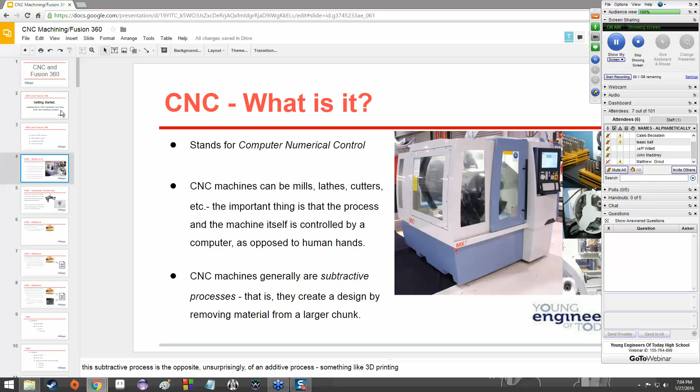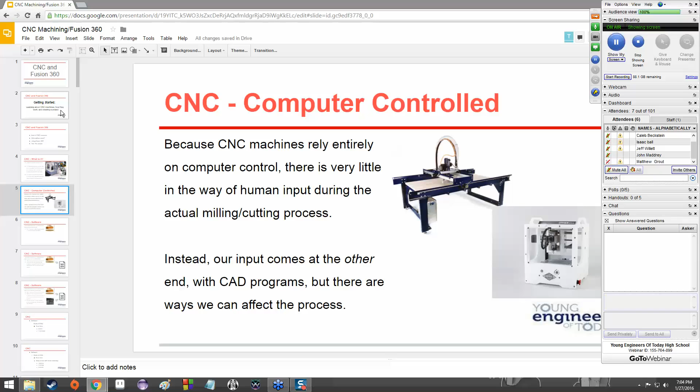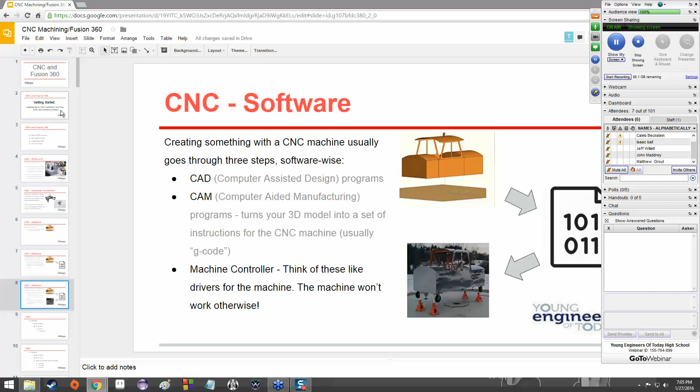Most of your input is going to come through CAD programs in generating the actual initial design, although there is some stuff you can do in CAM programs, which will allow you to change how the model - or how the machine - is going to cut out the model from the stock. So it can be either a faster cut or more precise. You do it to ensure you don't accidentally cut off any pieces of your model or anything like that, just various things. And then there's the machine controller, which are drivers that eventually control the machine, sending the instructions to it so it can cut out whatever you've set up.

We talked about the different kinds of CAD software. There's more freeform and artistic software, some software that lies in the middle, and then the very engineering-based, professional grade software, which Fusion can count itself among. If you guys get familiar with this, you should be pretty well prepared for a lot of other technical CAD programs that might come your way, like SolidWorks for instance. SolidWorks is similar enough to Fusion that you would have a much easier time figuring your way around everything.

And then we talked about CAM software, different types of CAM software, mostly having to do with manufacturers, who they work with or don't work with, what they can do, things like that. And then machine controllers - again, like drivers - they can be operating system specific, brand specific, or more generalized.

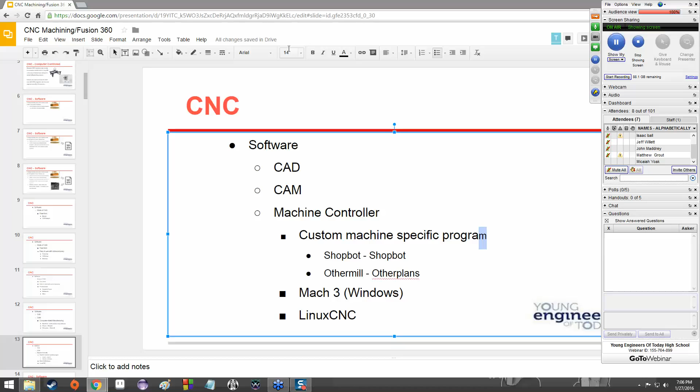We said that most software has at least a couple of these steps integrated into it. For instance, Fusion 360, which we're going to be working with...

Cat is lying down on a bag that has more bags inside of it and is just making so much noise. Sorry if you can hear that.

Most of these have a couple of steps integrated directly into them. Fusion 360 is CAD software, although it can function as CAM software as well. There is a CAM portion of the program that you can use to get it set up for a CNC machine, so it serves double duty. Once we get far enough with the bookcase, we'll spend some time experimenting with the CAM part of Fusion 360 so you guys can get familiar with that for your lab portion.

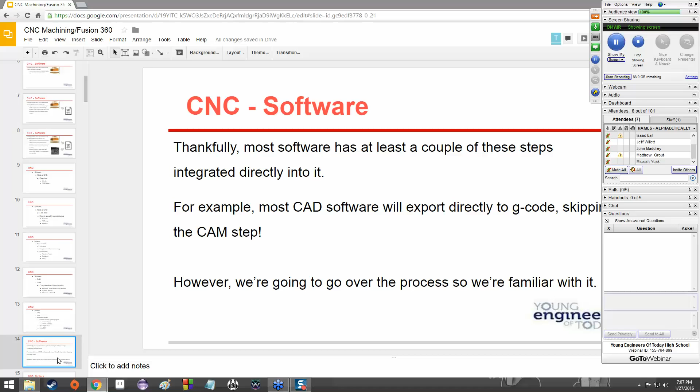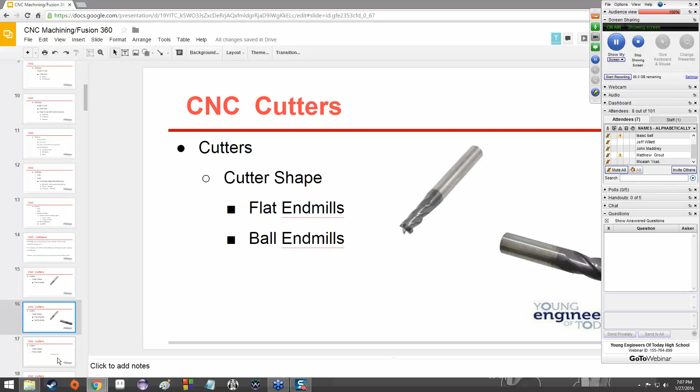We talked about the different types of cutters, just a couple of examples. Cutters will serve different purposes based on their shape and things like that. You might need one in order to get a cut started. You might need another one to shave things off the side. You might need another one to get more of a tapered cut on something without rotating everything. It all depends on the tool you have and the purpose you want to use it for.

And then we talked about some of the properties that you can affect in a CNC machine, specifically speed and feed rate. Speed being the rotational speed of the cutter in revolutions per minute, and feed rate being the speed that the cutter is moving through the stock.

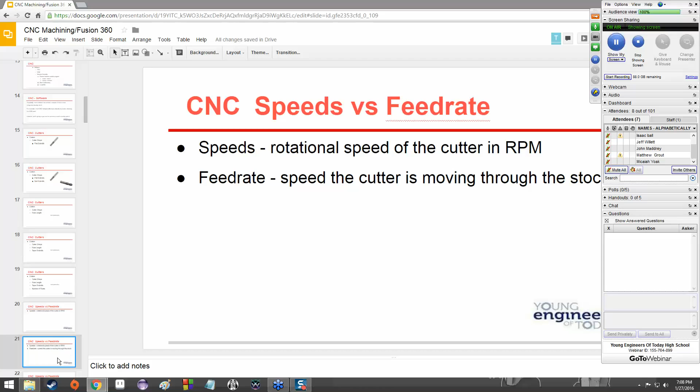Can't really do that because it's going to change based on the job, based on what you're using, all that kind of stuff. So you want to generally look at the recommended settings on an Othermill or a Shopbot or whatever kind of CNC machine you're using, and fiddle with it from there. Say, maybe I want it to be a little bit more precise, so I'll have it go a little bit slower, that kind of thing.

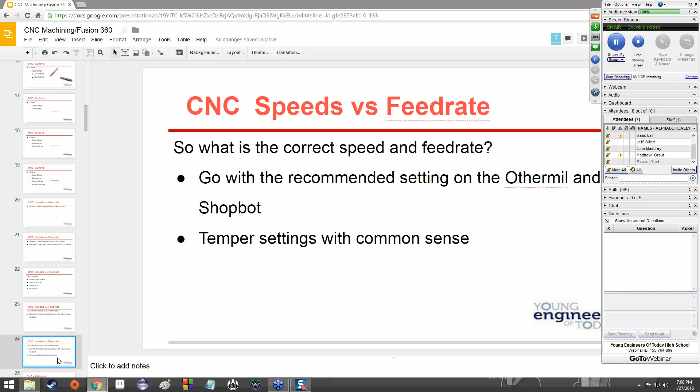It matters though, because you want to make sure that you don't break any of your cutters, and you want to keep it as accurate and precise as possible, so that you generally have a nice-looking model.

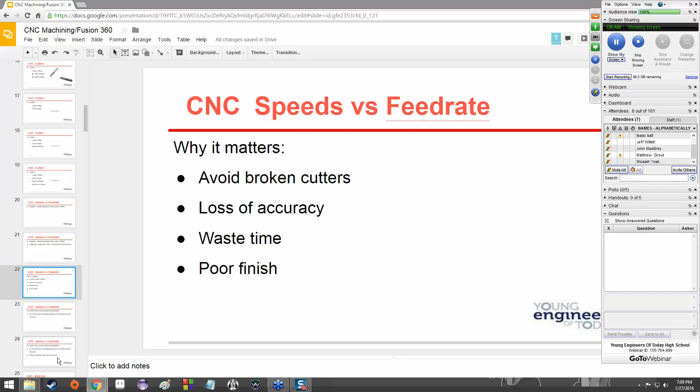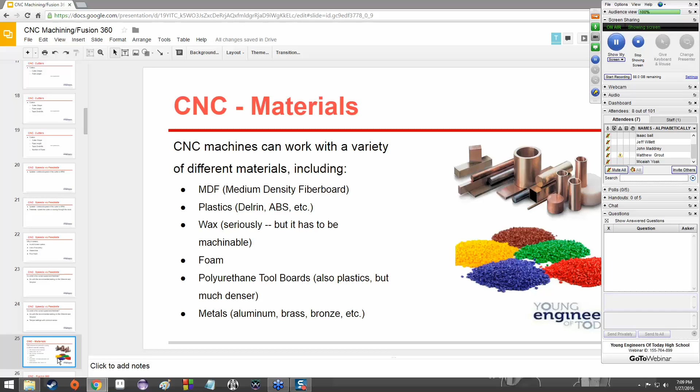And then we talked about the kinds of materials it can use. We actually talked about a decent amount on Monday: metals, plastics, wax, foam, wood, medium density fiberboard, which if I remember correctly is a type of compressed wood. Anyway, just a whole bunch of different stuff.

And then we went over the process for getting it downloaded from Fusion 360's site. So we spent a little bit of time getting that downloaded and started for you guys. Hopefully that should be downloaded now.

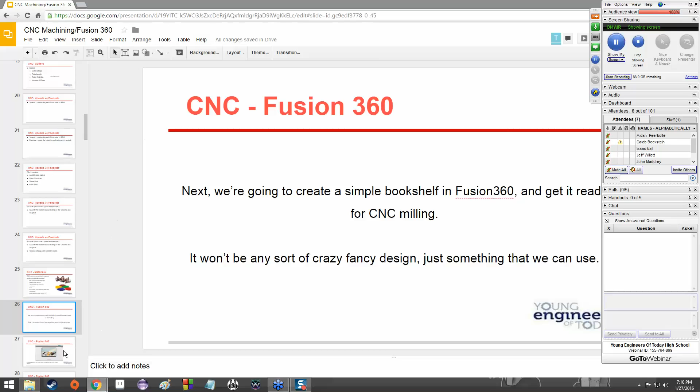So let's go ahead and open up Fusion 360. Where is it hiding? There it is.

Fusion 360 is a decently memory intensive program, so it can be a little bit slow to start up the first time, especially if there's something to download. So be patient, give it maybe a minute or so to do its thing.

If you already have an account, that's excellent, just go ahead and enter in your email address or username and your password. If you don't, you can sign up, and of course that requires some personal information.

Now, Autodesk is generally a name you can more or less trust, so you don't necessarily have to worry too much about what kind of information you're putting in there. So you can put your information in there, that's okay.

First name, last name, give it an email address, and then set up a password, and then make sure to agree to the terms of service, the second checkbox. You can keep the first checkbox unchecked because all it does is send you emails about promotions and stuff like that.

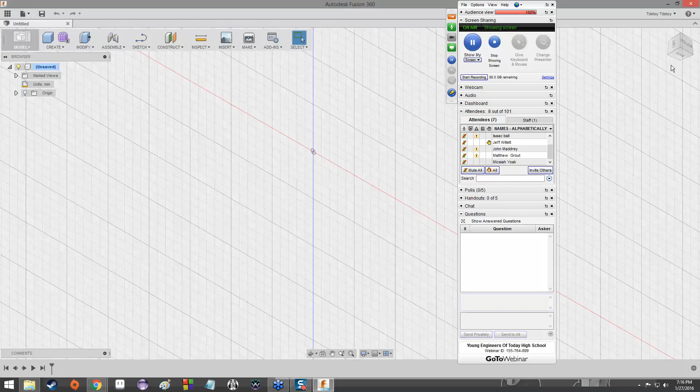You can also notice that if you mouse over individual bits, they get highlighted, which means you can click on it and it will automatically bring that to the front. So I clicked on the far corner and it automatically reoriented everything so that it was back at the front. I can click on a plane, or a face rather, in order to look directly on that face. I can also click the home button back here and it reorients me to a 3/4 view, a more traditional view that tends to be used a lot for 3D projection and stuff like that on computers.

Now you'll notice that I've also got a grid down here. The grid is in whatever set of units you have it set to. In this case, it's going to be millimeters, but we're actually going to change that in a moment. This allows you at a glance to tell how large something is, or what it is relative to something else. But you've also got these colored lines, a red line, a blue line, and if I change the orientation so I look at it front on, you've also got a green line.

Those of you who have used math before, so pretty much everybody, may be able to make the connection between these and the different axes. So you've got the x-axis, the y-axis, and then vertically you've got the z-axis. Where these all meet is going to be the origin. It all sounds pretty familiar, right? That shouldn't be anything new. So that's a good way to orient yourself on the Fusion 360 plane, is to figure out where your axes are and figure out where the origin is. That helps you keep track of where you are and where everything is.

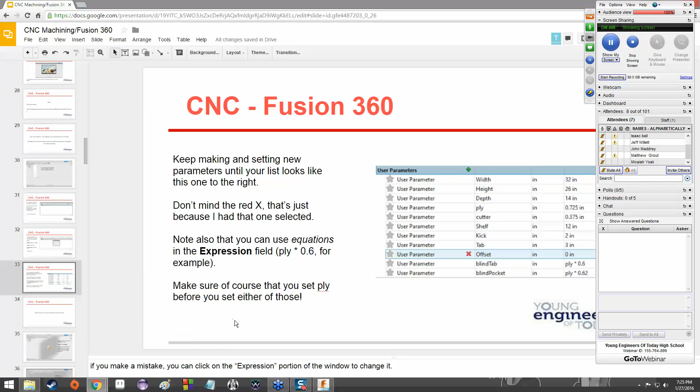So let's add in a new value, and we're going to call it blindTab. Lowercase b, but a capital T. B-L-I-N-D, capital T-A-B, all one word—it has to be all one word. That's the reason I'm using the capital T here, so you can more easily tell that they're two words. So far so good, right? blindTab, it's a name. We're already well familiar with names. I don't need to explain names to you.

However, in this expression field—this is the reason why it's called expression instead of value—we could put in like 0.3126587 or whatever, and let it figure out its deal from there. Or, we can put in a mathematical expression. In this case, ply times 0.6. And then as you see, value automatically populates with a number, 0.435.

So ply times 0.6. Now, why might this be useful? Well, let's say we're using blindTab down the line, and we've built the project halfway, and then we go, wait, the ply of the wood we're going to be using is different—it's actually going to be thicker ply. Normally that involves—and by the way, that kind of situation will happen a lot, not just in engineering but everywhere, but especially in engineering, where the constraints of the project or the materials you're working with will suddenly change. Normally, if you put all these values in hard-coded, you would have to go back and change all of them.

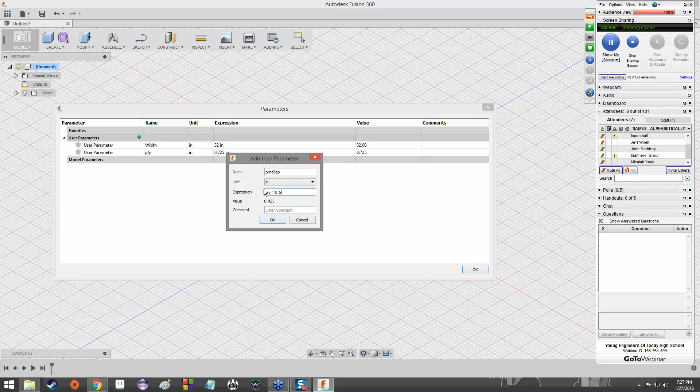So, cool. Once that's done, hit OK, and look at that—under expression it'll say ply times 0.6, and the reason it's OK is because I used all lowercase letters like I did with ply, and then it'll fill in with a numerical value here.

So with that in mind, let's go ahead and have you guys enter in all of these other values once it actually loads. Eventually. Extra challenge, fill in these values while you can't see them.

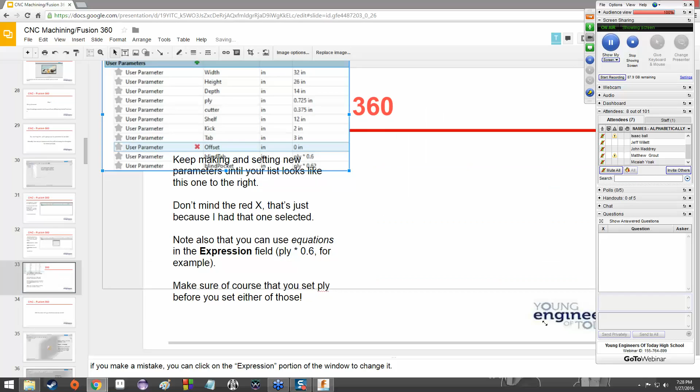Seems clear to me that Google Slides doesn't like me right now. Okay, let me go ahead and make this larger, and then I'll move this to the background.

There you go. Can you guys read that? Raise your hand if you cannot. Okay, so far so good. Go ahead and enter those in, and then raise your hand once you've entered them all in.

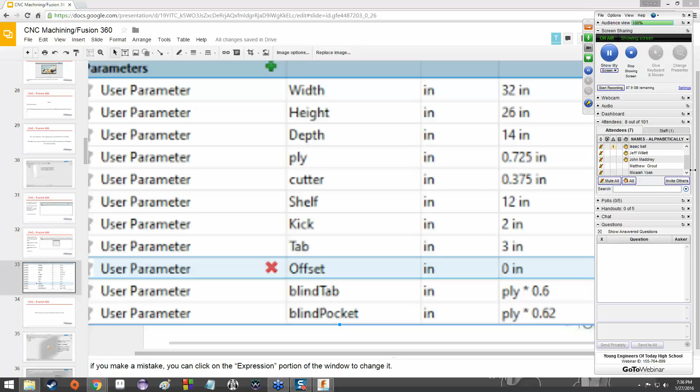So, okay, I rambled on long enough. Let's go ahead and return this back to its former state. Perfect. So now we've done that.

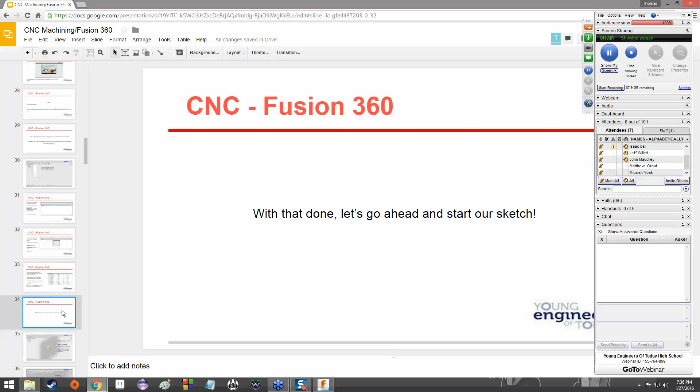That's pretty much all the prep work we need to do in order to get our sketch started. So now what we're going to do is I'm actually going to finish the stuff, because I was so wrapped up in making sure you guys had that stuff down that I didn't actually do my due diligence. Whoops.

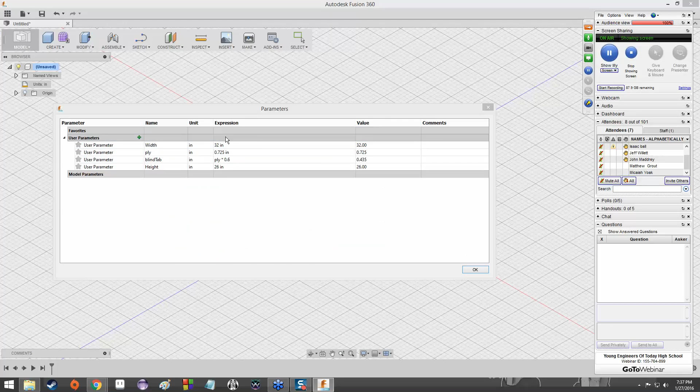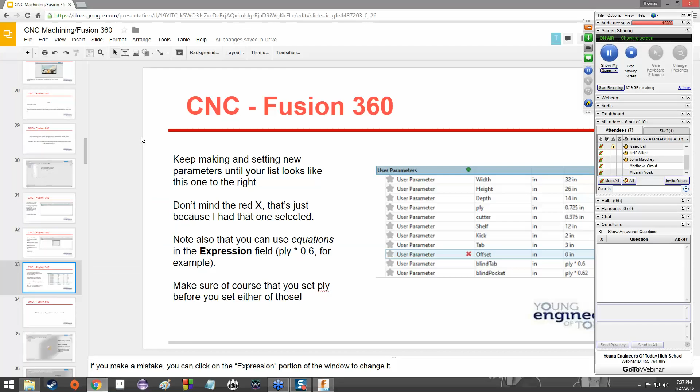Zero 0.62? Yep, 0.62. Okay, now that I'm done and I'm caught up with you guys, let's start our sketch.

So the way we're going to do that is we are going to go over here into our little sketch drop-down menu, and then we're going to select, mouse over rectangle, which is going to bring up another submenu, and then we're going to select two-point rectangle.

Now you should see these three sort of distorted squares. This allows us to start on a specific plane, so we can either start on the top, looking from the top down, or the front, looking directly at it, or from the right. So we're going to set it up so this is actually going to be the left side of the model, but we're looking at it from the right towards the left. We're going to do a side profile of our bookshelf, which means we're going to use the right plane. So just go ahead and select that one on the left.

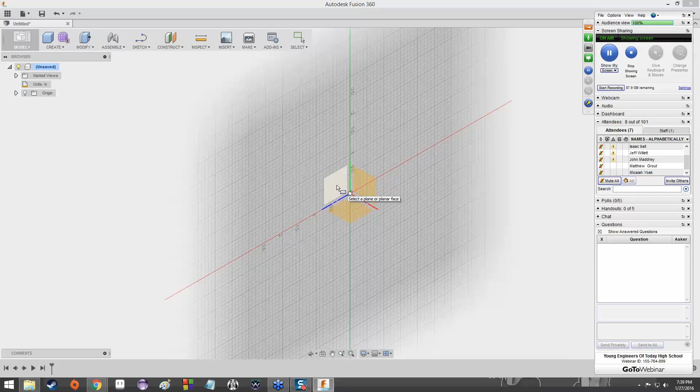It's kind of confusing when they're flipped around like that. But anyway, go ahead and click on the right one, and then it should zoom, and zoom over to the side like this. It's pretty neat.

So now we're looking at our grid from the side. As you can see, we got our z-axis and we got our y-axis here.

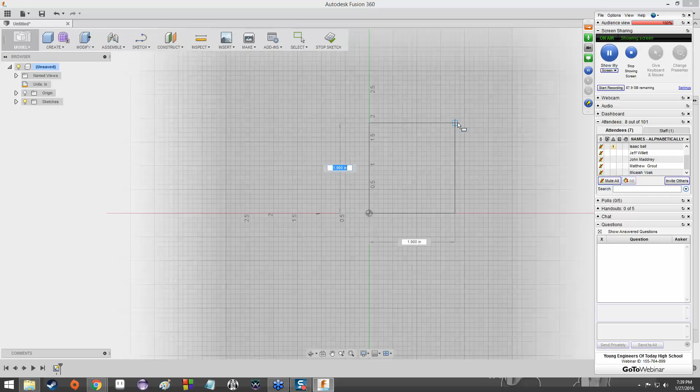Go ahead and draw a rectangle. Do not worry about the dimensions of the rectangle, just draw one. So yeah, I just didn't even think about it, I just went click, click, and made a rectangle. Why does it not matter, you might ask?

And if you did ask that, I would go, that's an excellent question. I'm actually just about to show you. What tab? Oh yeah, it's just under Sketch, Rectangle, two-point rectangle.

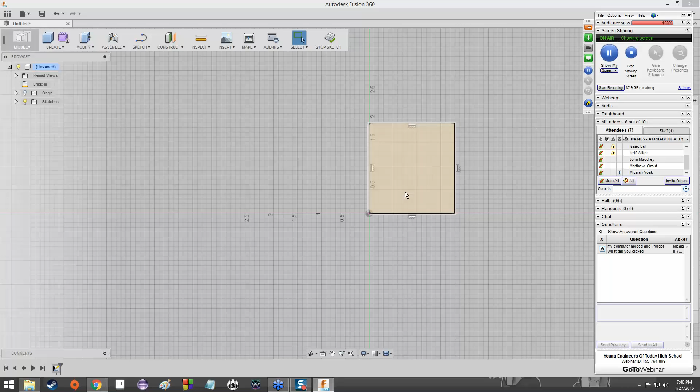And then that should bring you to the rectangle drawing tool. Make sure to select the right plane when you do it, which is on the left side. It's weird, the one that's not front or top. And you can check the little cube over here to make sure that you're looking at the right thing. If you click on it and now it says right, then excellent, you are in the, well, right place.

So, like I said, arbitrarily sized rectangle. Why is that okay? Well, I touched on it on Monday when I was introducing you guys to Fusion 360, but I'll go over it again here. That's because everything needs to be tightly constrained in Fusion 360.

That is to say, we need to set a dimension for pretty much everything to ensure that it's of the proper size, of the proper scale, and everything fits together nicely, because this is meant to be an engineering grade CAD program. So, with that in mind, under Sketch, go ahead and select Sketch Dimension.

Just click it, and now you should get a couple of vertical bars with a two-headed arrow next to your cursor. And if I mouse over any of these things, like if I mouse over any of these lines, you'll notice that they get highlighted.

So far, so good. Let's select this front line here and click once. Now we can move the cursor, and you notice there's a similar kind of deal - it's two bars, except this time they're horizontal, with a double-headed arrow. And there's a number on it, 1.9 in my case. Yours is probably going to be something else.

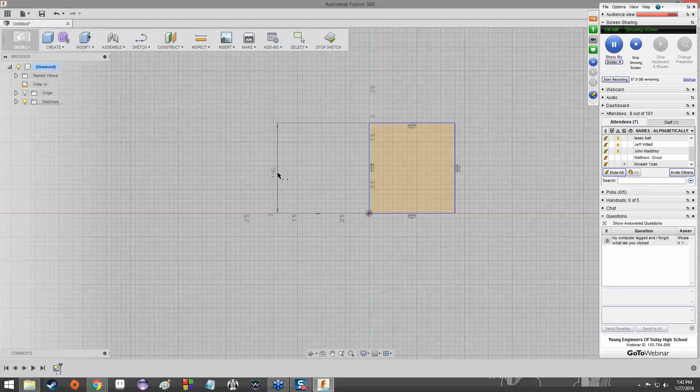This is telling us the size of it. However, we're going to do one more thing: pull it out an appropriate distance - that's fine, you could do it even closer - and then click one more time. Now that 1.9, in my case, turns into a text box. We can put in whatever value here. We could put in like 1,000,000 inches if we wanted to, and then this rectangle would resize itself so that this side, and by extension this side, will be 1,000,000 inches long.

However, we're going to leverage the user presets we just created. So instead of typing in a numerical value, I'm going to type in height. And you can see where the capitalization becomes important here - I used a capital H when I created my user preset. If I use a lowercase h, the text turns red and it goes, I don't know what you're talking about. And you gotta go, no, I meant height. And it goes, oh, height, okay, and then it turns black and everything's okay.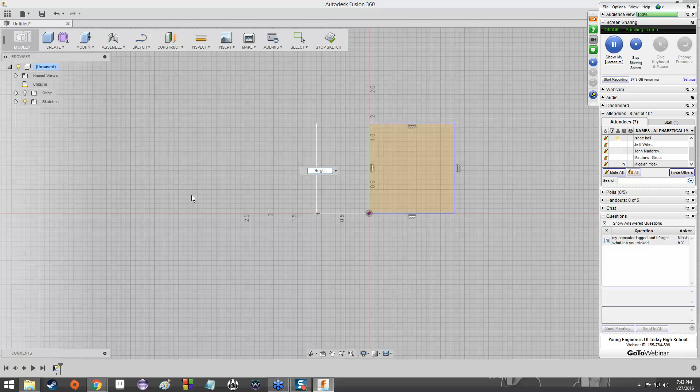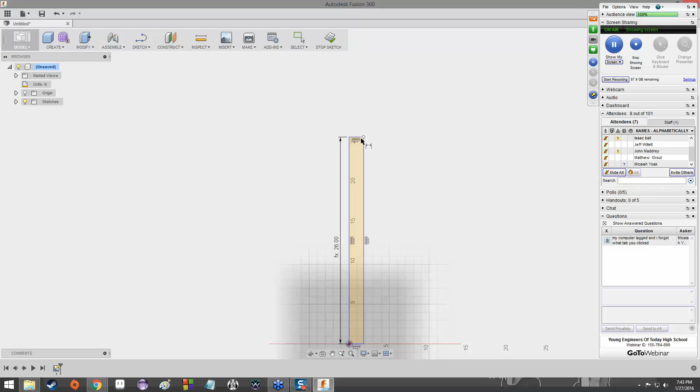So I'm gonna type in height, and then hit enter. And look at that, it automatically resized itself to something way larger than I was initially using. I made a tiny little rectangle, and it was actually far too small for our bookcase. It would be a bookcase for ants. I mean, really.

So now that it's properly resized as far as height is concerned, as you might imagine, we're going to do the same thing with the top. Go ahead and click once on the top, drag it out a little bit, click again. This one is going to be depth. So we're using height and depth right now. And the reason we're using depth is because we're looking at it from the side, right? If we were looking at it front on, we would be using width. But because we're looking at it from the side, we're going to be using depth.

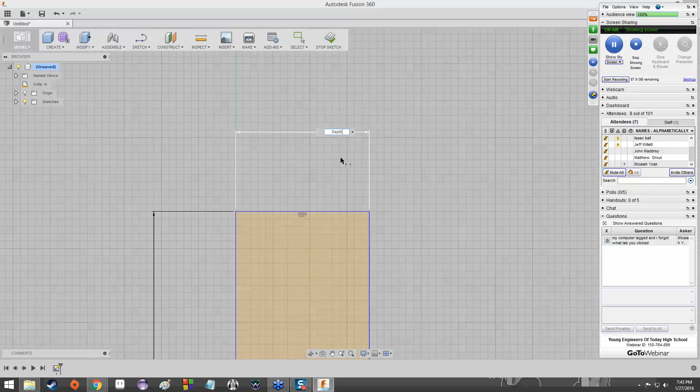So height and depth, it'll resize itself again. And would you look at that? We got ourselves the outline of a bookcase, but we're not done yet. No, sir, we're certainly not done yet.

So hit escape once you've dimensioned both of those, and now you should have two dimensions here, one that's labeled FX26 and one that's labeled FX14. So we know that this is 26 inches and this one is 14 inches. The reason it's FX is because it's a function, the result of a function.

Anyway, that's something you don't really need to worry about too much unless you go into the more abstract and esoteric side of CAD modeling, which requires you to enter in equations in order to draw 3D models on the screen, which can be a lot more powerful, but man.

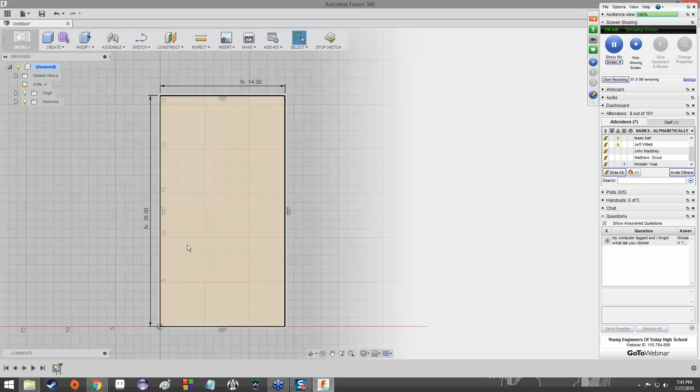Anyway, we've got the side of our bookcase. This is roughly how large it's going to be. Obviously, it's not to scale, since my computer screen is not nearly large enough to render 26 inches looking like that. And I'm taking a reasonable assumption here and saying that your guys' probably aren't either. But anyway, at least we have some sense.

So now that we've done that, what do we do next? So we've drawn a rectangle. Boom, boom. We're going to draw 3 more rectangles directly onto it. So again, sketch, rectangle, 2-point rectangle.

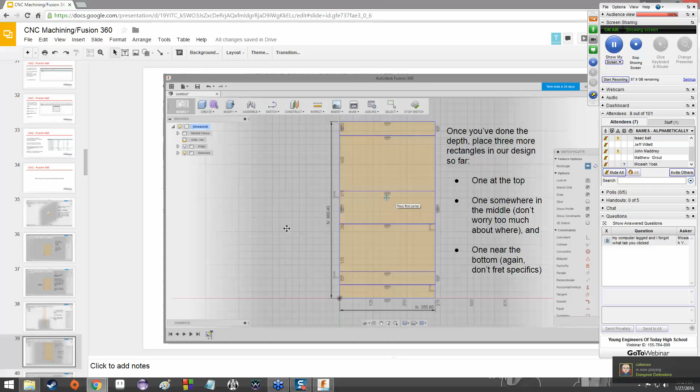We're going to draw one directly on the top, one somewhere around the middle, and one almost at the bottom, not directly on the bottom. So as you can see now, I've got 3 more rectangles: one right at the top, one kind of in the middle, and one near the bottom. Again, the spacing doesn't really matter, you just got to make sure that they're sort of in this general vicinity area. And on top of that, they need to be touching the front and the back of your initial bookcase rectangle, so they need to have the same depth as your bookcase rectangle.

Once you've done those 3 rectangles, we're going to do 2 more rectangles, except this time they're going to be vertical. We're going to do one right at the back that runs from the top to the bottom, and we're going to do one kind of nearish the front.

So once that's all said and done, yours should look something like this. Obviously with different proportions, because right now we're not worrying about the proportions until we dimension everything. But you should have 3 horizontal rectangles and then 2 vertical rectangles.

Now you'll also notice that because these rectangles intersect, what Fusion has done has automatically turned them into separate rectangles. So now we've got a whole bunch of them, as opposed to just 5 more that were initially there. There's now 1, 2, 3, 4, 5, 6, 7, 8, 9, 10 - 10 more rectangles, just because they all got cut up like that.

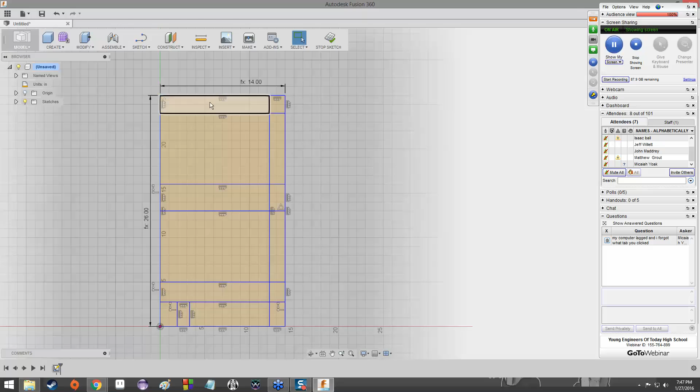Now these are going to function as the sort of the outside and back of the bookshelf, the shelves, and the little kick plate in front, which will be useful so that things don't get caught underneath.

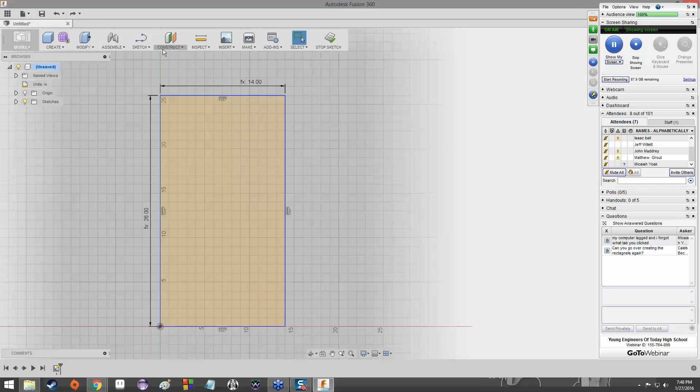And yeah, definitely. Creating the rectangles, yeah, let me just go back a few steps. You're talking about after you create the initial one, right? Am I correct in saying that?

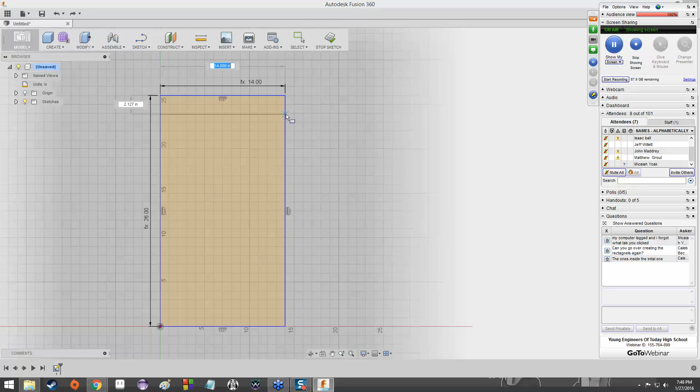Okay, cool, yeah, just want to make sure. So sketch, rectangle, 2-point rectangle, and then you got to make sure that they run from front to back. The horizontal ones run from front to back. So put one right at the top, one somewhere inside the middle - it doesn't have to be exactly middle, don't worry about it - and then one near the bottom.

And the only one that needs to be in a specific location is the top one, it needs to be at the top. The other ones, you can just kind of eyeball it. And then, once you've done your horizontal rectangles, you're going to do 2 vertical rectangles. One that's on the back, running from top to bottom, and then one that runs from the bottom of the bottom horizontal rectangle to the bottom of the bookshelf.

So after all is said and done, it should look something like this.

How do you delete rectangles? I've just been using undo, which is Control-Z. Control-Z is your best friend. That's usually a lot easier than having to go through and delete them, because sometimes you can't just delete this one, you have to delete the lines in here too, and it just kind of turns into a pain. So if you hit Control-Z, it will undo the last thing you've done, and you can chain those together so that you can undo multiple things.

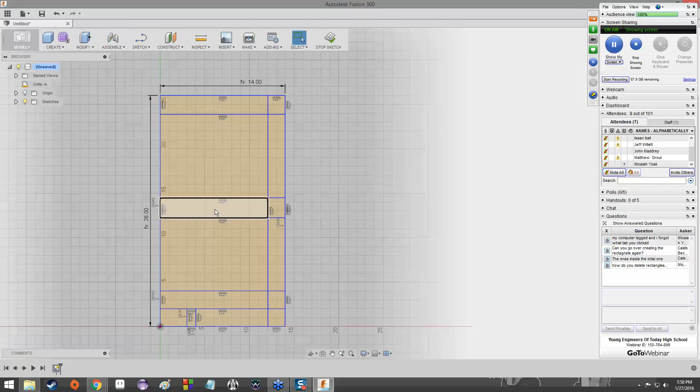So let me know once you've got all those rectangles up and running on your guys' models, your sketches. With a show of hands. Cool, excellent.

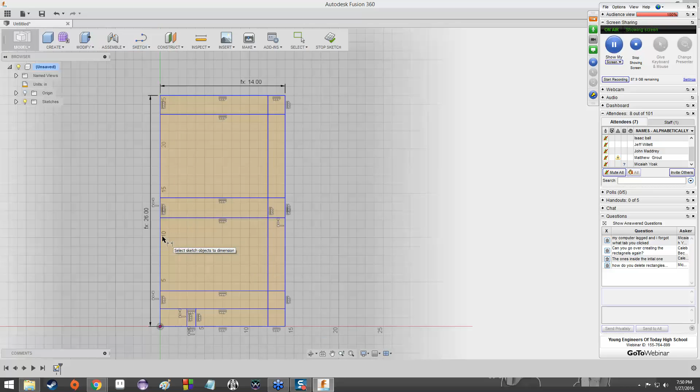Just about everybody. Okay, let's start dimensioning these real quick before we call it a day. So, sketch, and then sketch dimension, just like before. But now things are getting a little wonky, so follow along closely to make sure we're all on the same page here. Let me just make sure I'm doing everything right. Yeah, okay.

I'm going to zoom in on this top one right here so I can show you guys better what I'm looking to do. I'm going to click on the bottom line of the top rectangle, and then the top of our bookcase, so now both of them are selected. It might be difficult to see depending on the bitrate on your end, but now I've got that double-headed arrow running between these two lines. I can drag it out, and there we go. Now I've got a measurement that is the distance between these two lines.

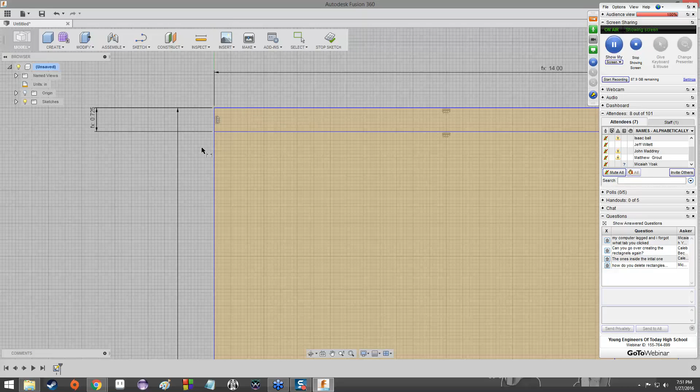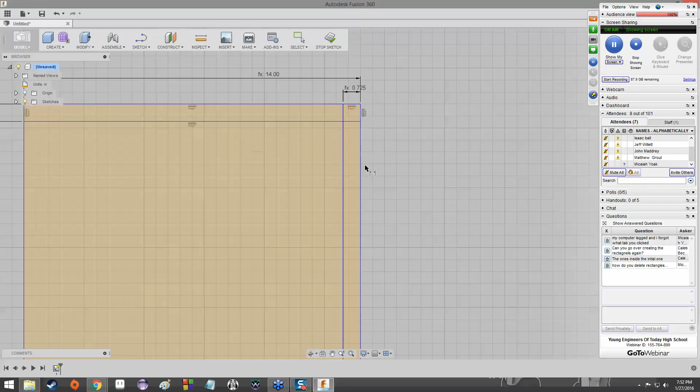I'm going to set that one to ply. And now, as you can see, the thickness of this top rectangle has been modified. We're just going to do that with each of these rectangles we just made. So that one's also going to be ply. As you can see, we have a nice consistent top and back here. This one's also going to be ply. Bada bing, bada boom. This one's also going to be ply. And as you might imagine, this one is also going to be ply.

So zoomed out, you should see that the rectangles we generated are now appreciably thinner. Well, at least on my end.

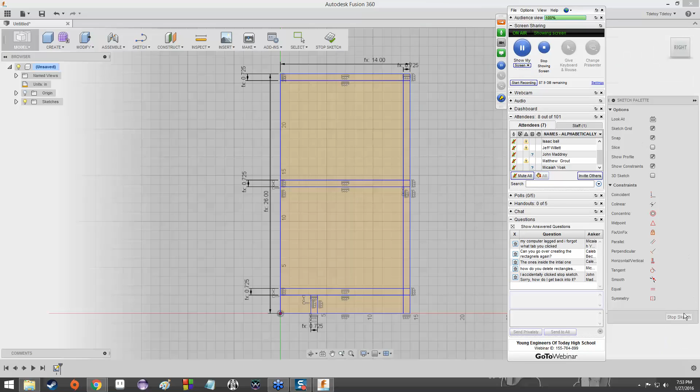Stop sketch. Which one, for the rectangles or for sketch dimension? Or, oh, you mean in general. Okay, yeah, you can just go back up to... you can just undo it. Undoing it is fine. Control Z, you're right back to where you were. Yeah, no problem.

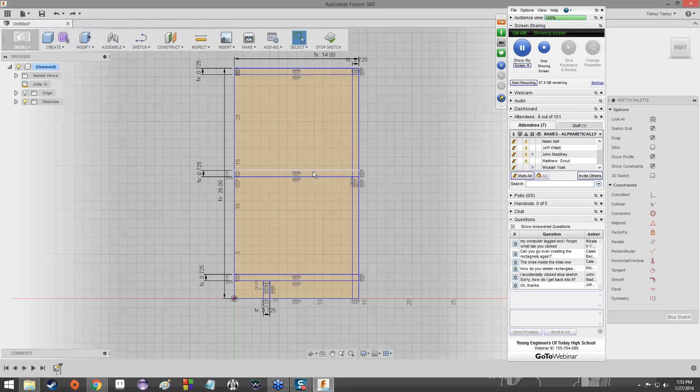So now that we've got the thicknesses dimensioned, and they're all ply to make things easier, let's see if we can squeeze this in real quick before the end of the class.

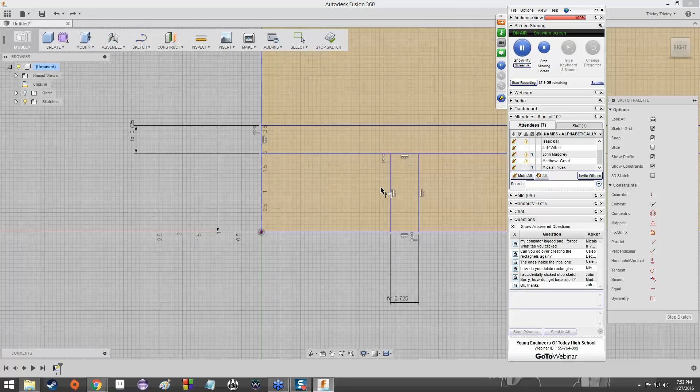I'm going to go ahead and dimension... whoops, I'm going to hit sketch dimension, not stop sketch. This line right here - what we're doing is we're going to dimension this particular rectangle out fully, and that's going to be with kick. Now, mine just happened to already be 2 inches, so nothing got resized, but yours might be resized, which means this one gets pushed up or down and everything moves to accommodate, which is fine. That's one of the powerful things about Fusion, is it will resize everything automatically to make sure everything fits within the constraints you're asking for.

So I told us so far, the overall shape and overall size of this thing is going to be 26 by 14. The height of this bottom rectangle is going to be 2. The thickness of all these inside rectangles is going to be 0.725. Figure it out, and it will. We're actually going to go a little bit further than that.

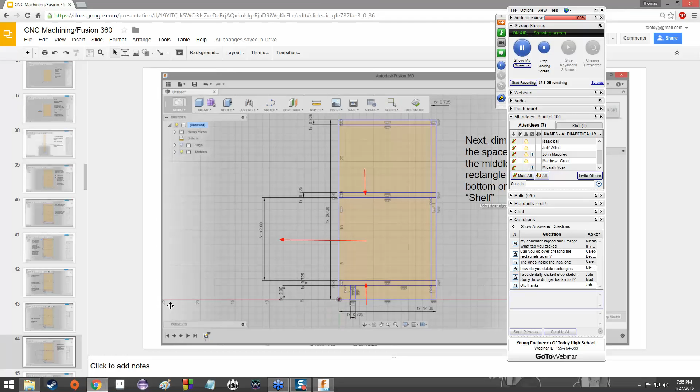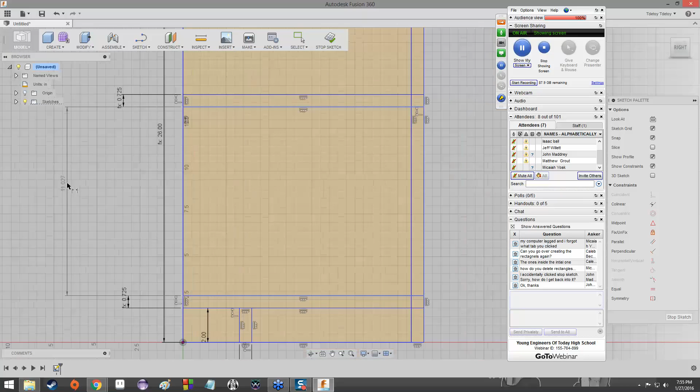We're going to dimension this space in here. So let me zoom in again. The top of this bottom horizontal rectangle and the bottom of the middle horizontal rectangle - I know that sounds weird, but it might make sense in a moment. We're going to sketch the distance between those two with shelf. Hit enter, and it automatically opened up a little bit. Let me just make sure. Yeah, and then one more - I think we can squeeze one more in there.

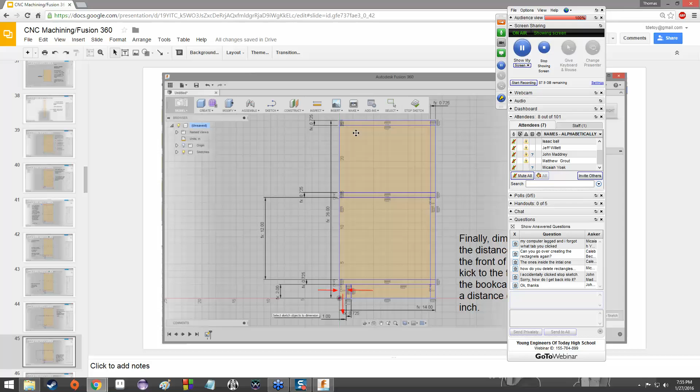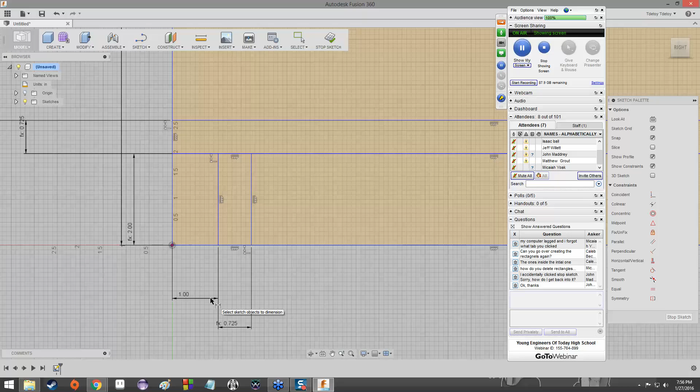So last one, we're going to sketch or dimension the distance between the front of the kick plate and the front of the bookcase, and that's going to be a distance of just 1 inch. It's going to be one of the few times we actually use a hard-coded number in here - hard-coded, that's the computer scientist in me coming up. So boom, now that we've done that, we've actually fully sketched out the cross-section of the bookcase from the side.

Just make sure. Yep, yep. So this is what the bookcase would look like if we were looking at it from the side. Obviously we're going to need to bring it into 3 dimensions, but so far so good.

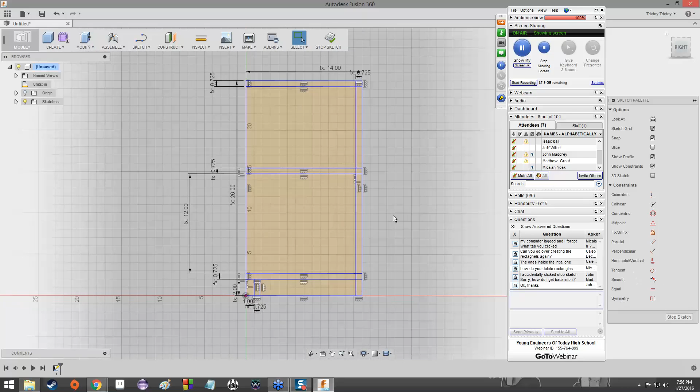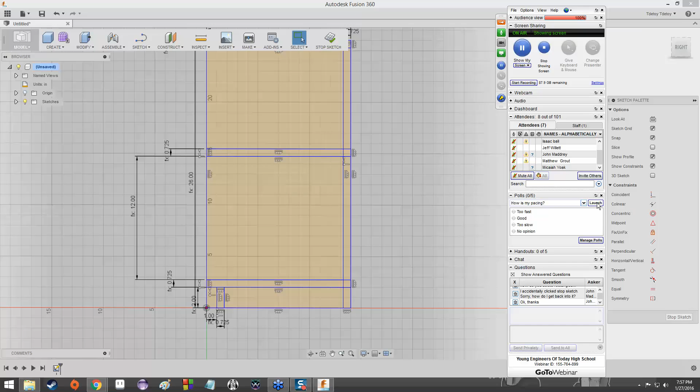And that should actually do it for today. We're out of time, so I'm going to ask the poll questions, and then of course I will keep it open for questions afterwards. You guys are more than welcome to, if you want me to go over something again, just let me know, I'll be happy to do it, just so we're all on the same page. I just wanted to get at least the sketch done today so that we could start making it three-dimensional for next time around.